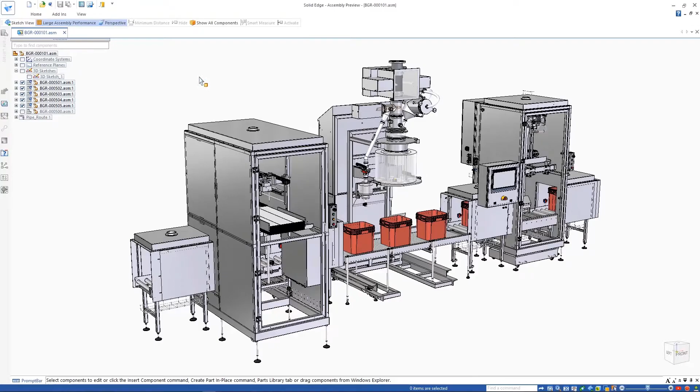Solid Edge supports modern product development processes, allowing you to do more with your resources and enabling new ways of working. First up is a new preview mode for large assemblies. Assembly Preview Open allows users to reduce the amount of data loaded, allowing assemblies of any size to be opened in seconds for the quick review of a design.

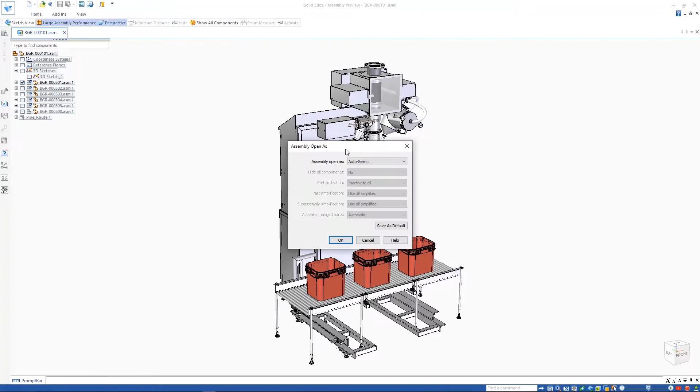Users can manipulate the view, change view styles, hide and show parts, or change display configurations. Here, we'll reduce the scope of what needs to load by showing just the main unit of this dosing machine before loading the assembly into edit mode.

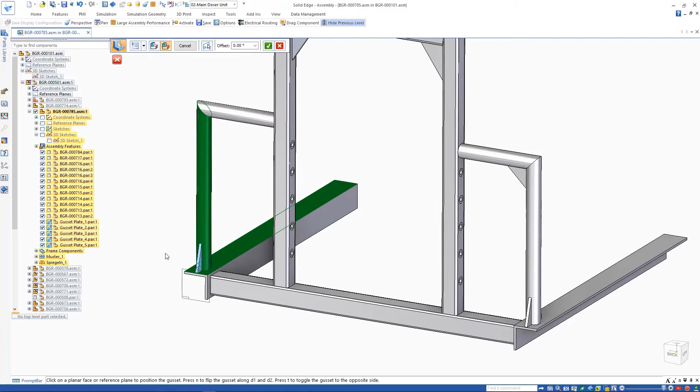Another time saver is the ability to rapidly add strengthening gussets, typically used in structural frames. A gusset may be placed simply by selecting the adjacent faces of appropriate parts. They can also be applied to cylindrical faces. Users have full control over the placement position, including angle, and gussets are included in the bill of material for the assembly.

Continuing with the internal components theme introduced in the last release, Solid Edge now provides the ability to create new internal components using assembly modeling capabilities. Here we have a pneumatic cylinder assembly which has been imported as an internal component structure. An additional bracket is required, but as it's part of a purchased assembly, we'll model it as an internal component. Defining it as a sheet metal part, we can also give it a name and material.

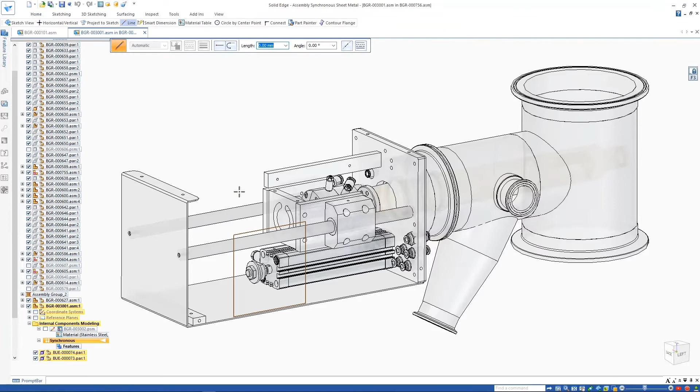Looking at the home ribbon, we can see that we have a full range of sketching and modeling tools at our disposal in the assembly modeling environment. As we sketch the profile for each sheet metal bracket, a new context toolbar provides the most logical functions based on the type of object selected. This makes quick work of applying relationships and dimensions on the geometry.

Dragging the sketch creates a contour flange where the length and thickness can then be defined, followed by some corner breaks.

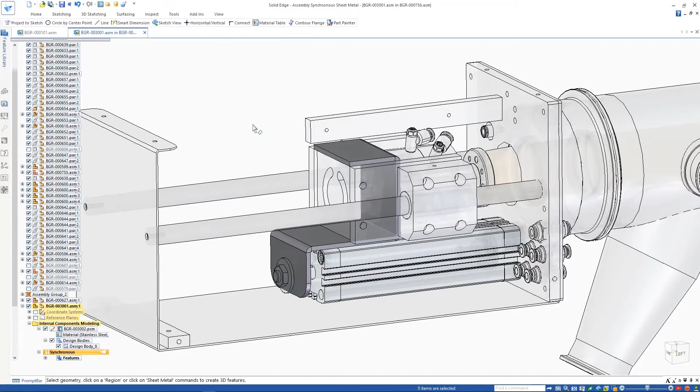Some additional holes will help assemble the bracket. This can be easily generated by referencing geometry from the surrounding physical and internal components. The Pathfinder provides access to the material to be amended, along with the gauge properties for the part if necessary. The list of features that have been modeled can also be seen.

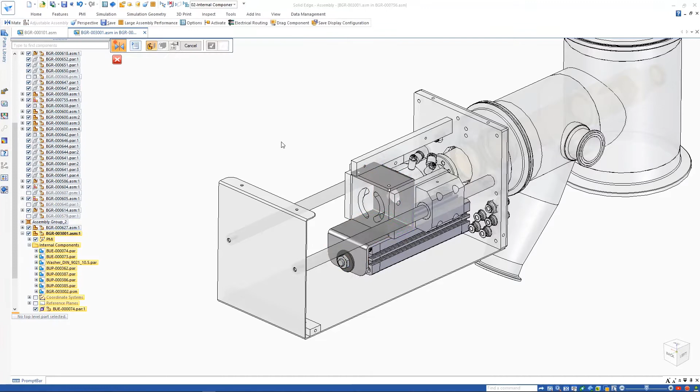Once the internal component is complete, the Relationship Assistant makes light work of creating the correct assembly constraints. The operation of the dosing system can then be simulated even though the cylinder consists entirely of internal components.

The new Component Finder speeds the process of locating parts. Simply enter the first letters of the name and the selective list displays the valid matches.

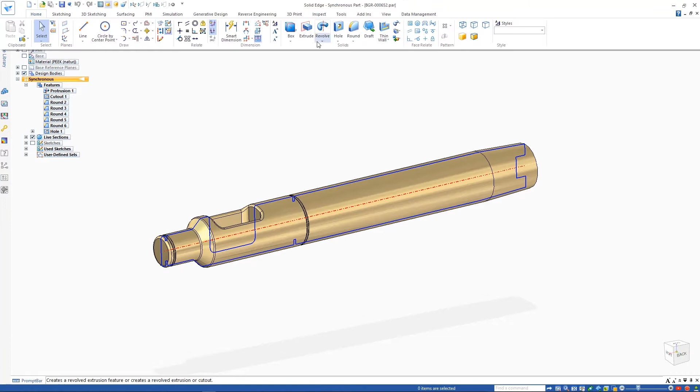A new Synchronous Revolve capability dramatically speeds the ability to edit cylindrical geometry. Simply select the faces that need changing by using shortcuts to speed the process. As the geometry is changed, design intent rules can be used to control the result.

The depth of the pocket shown here needs to remain fixed, so the Move Faces option provides the flexibility to control this by retaining the original geometry.

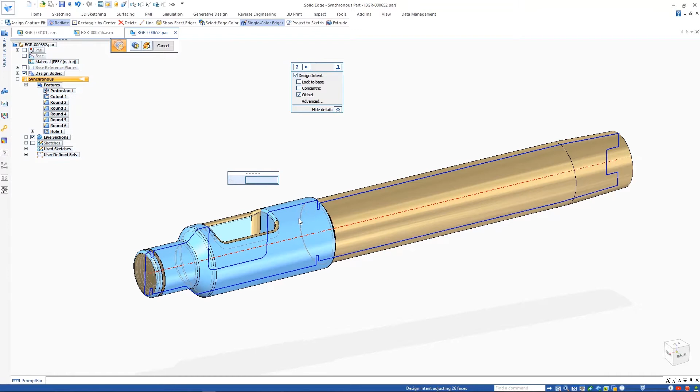A new Assign Capture Fit command allows relationships to be predefined in common parts, which allows them to be automatically assembled. Here we can see the relationship group of this handle component. Adding an additional planar align will complete this group definition.

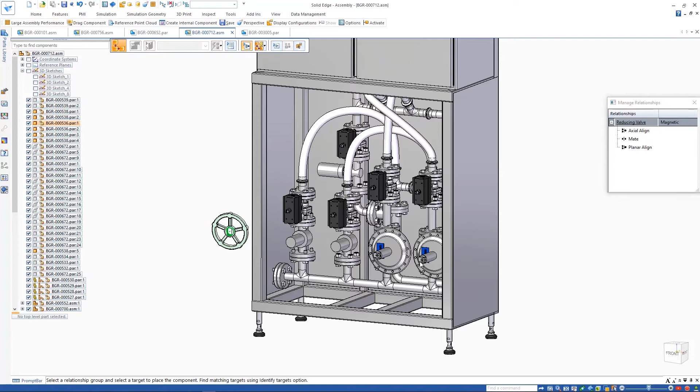Placing the handle into our assembly and then selecting both target components automatically assembles them. Placing another handle, the Identify Targets option visualizes the matching components. Confirming the action assembles them at all 5 locations.

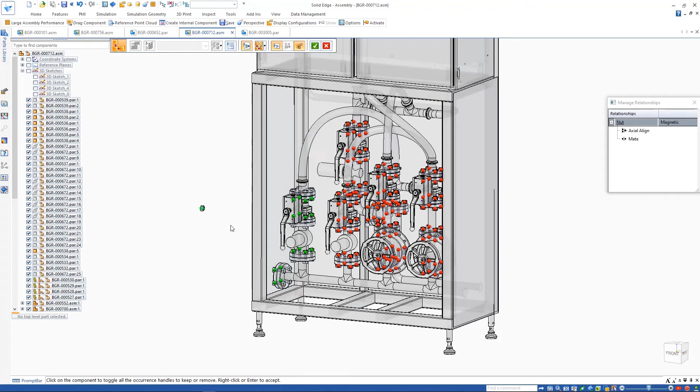For this fastener, there are a lot of matching locations, many of which are not required. The Toggle Component option allows a quick fence select to rapidly place the remaining 16 instances.

Solid Edge introduces the ability to reference point cloud scans in order to visualize a design in its intended environment. The command supports all common formats. Full control over point density and size is available.

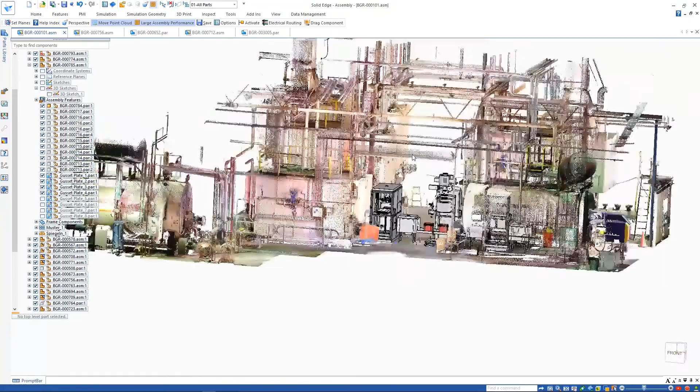The point cloud can easily be repositioned in relation to the Solid Edge model, and clipping planes can be used to focus on a required area of the design.

Displaying the tank and piping that feed the dosing unit, we can see that its position isn't ideal and needs relocating. A quick positional edit will fix this. Measurements can even be made between the model and scan geometry to ensure correct clearances.

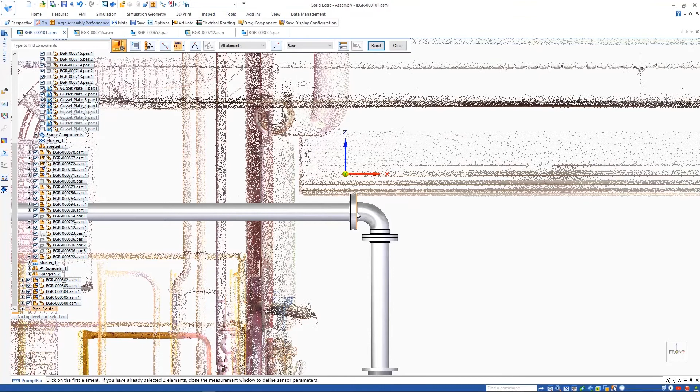Working in partnership with our customers, we've added more than 500 enhancements to our latest release. These are just a few. Solid Edge, engineered to grow your business by delivering enhanced core functionality, productivity, and performance to enable the digital twin.